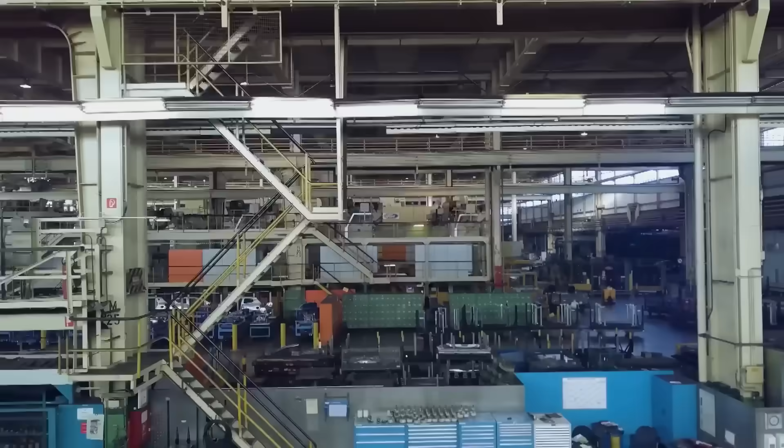The global economy is currently undergoing the greatest change since the Industrial Revolution. In order to remain internationally competitive, modern factories must be as flexible as possible and highly digitized. The smart networking of people, machines and industrial processes is the ticket to a new age. Industry 4.0.

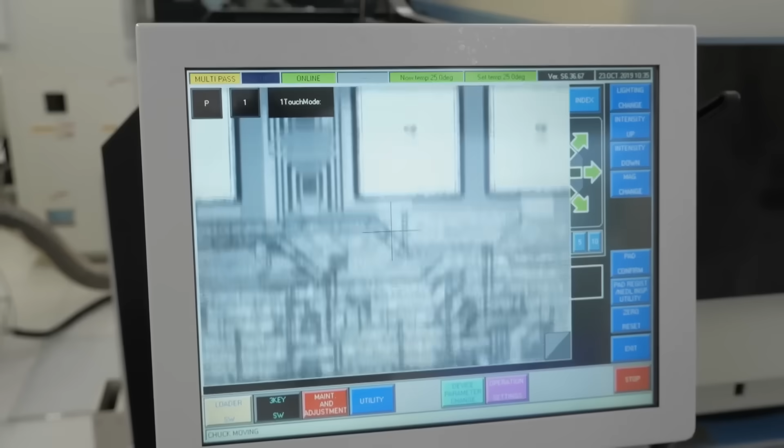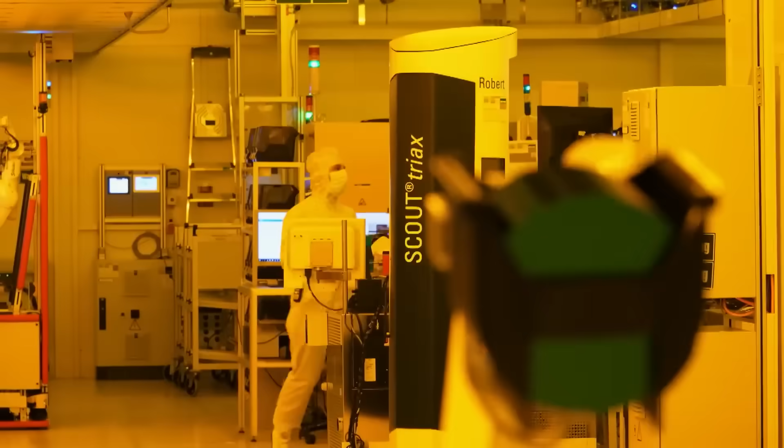Reutlingen in Baden-Württemberg has one of the most modern semiconductor factories in Germany. With meticulous care and highly automated, the soccer field-sized cleanroom produces around 1 billion micromechanical sensors per year, which are used in cars and smartphones. The structures in the nanometer range are applied to silicon wafers. Silicon is a semiconductor, but what is it good for?

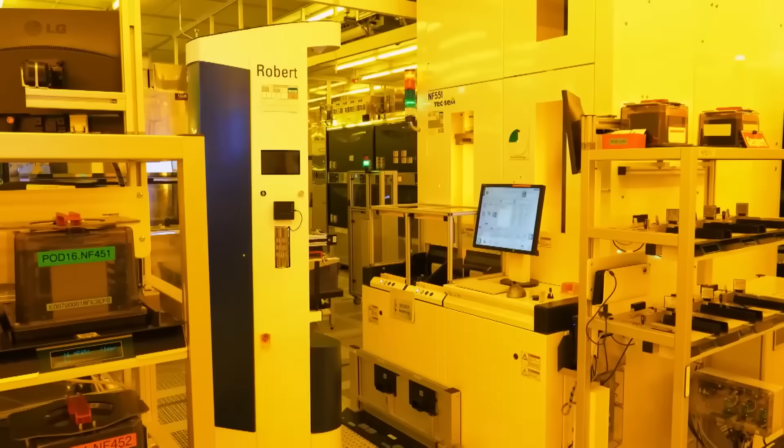Semiconductors, we actually have three terms here in the group: the senses of a device, the brain of a device and the muscles. We are currently the global leader. We've produced over 10 billion of these micromechanical sensors to date, both for automotive and consumer electronics.

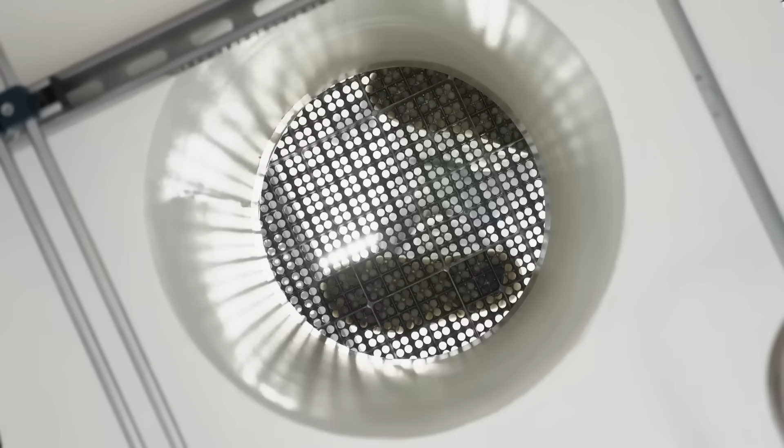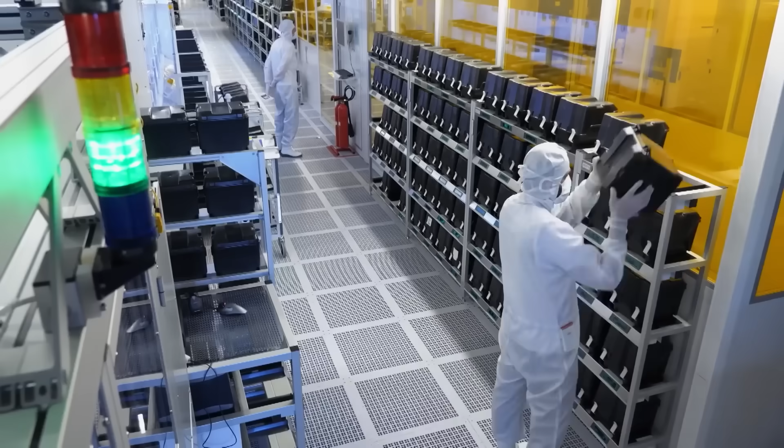In the so-called wafer fab, the future is being built. In the field of electric driving, autonomous driving, networking, but also in the consumer sector, we are continuously developing sensor technology. In the sterile, futuristic tech world of the plant in Reutlingen, as the internal code of the facility goes, it feels more like being in a space station than in a factory.

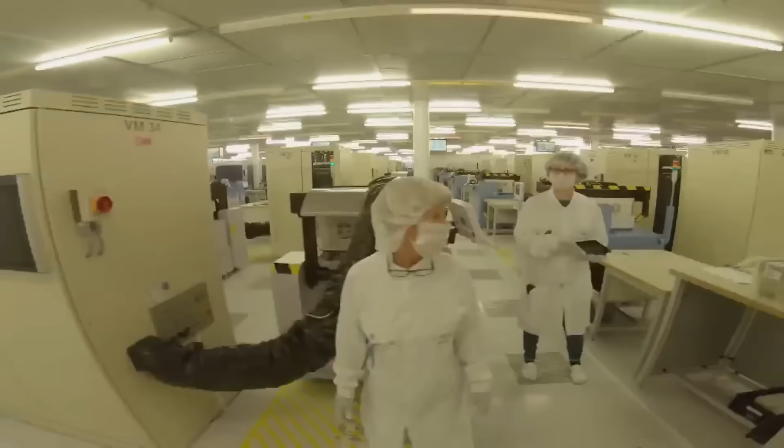Every square centimetre of the 23,400 square metre area is designed across several floors. A tremendous effort to enable precision in the tiniest of spaces. We model very small structures. The smallest are about 1,000 times smaller than a human hair. What is being built here in Reutlingen is found in countless products spread all over the world. In vehicles, mobile phones, in just about everything that requires electronic control.

Klaus Meder is chairman of the Automotive Electronics Division. In Reutlingen, we manufacture semiconductors and sensors mainly for the automotive industry, but also for the consumer sector and control units. Approximately half of all modern smartphones that you can buy on the market today contain sensors from the Reutlingen site, such as sensors that measure rotation rate, acceleration or pressure differences, and in every fitness tracker that we are likely to have today.

The group, which is best known to most people for domestic engineering, is also active in less visible areas of modern life. However, this would not be possible without a widely used chemical substance. The technical plant manager, Patrick Leinenbach, is responsible for semiconductor manufacturing at Bosch. The base material for our manufacturing processes is silicon. Silicon is a so-called semiconductor. It has both insulating and conductive properties.

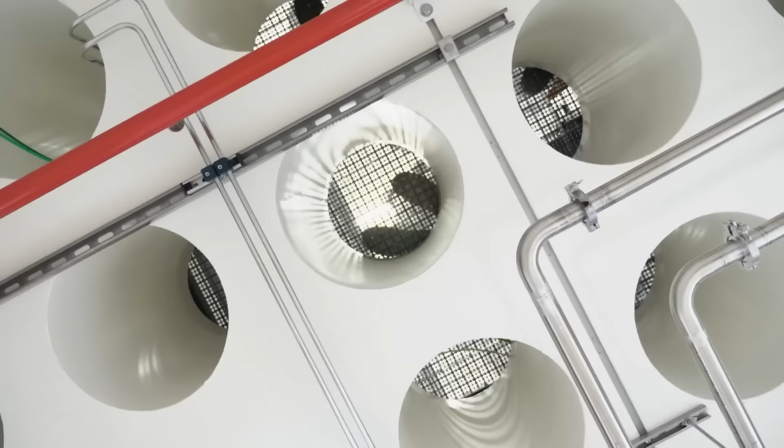To get this intelligence into the tiny parts, around 3,500 employees work in Reutlingen in 3 shifts. The real writing work on the silicon wafers is done by machines. Here, more than 15,000 of them. The wafer fab is a single highly automated machine that produces over 4 million individual parts a day. In order to maintain an overview here, computer-aided production control is required. Stefanie Hessel is responsible for this. Her team ensures that no errors occur during the thousands of strictly regulated parallel processes.

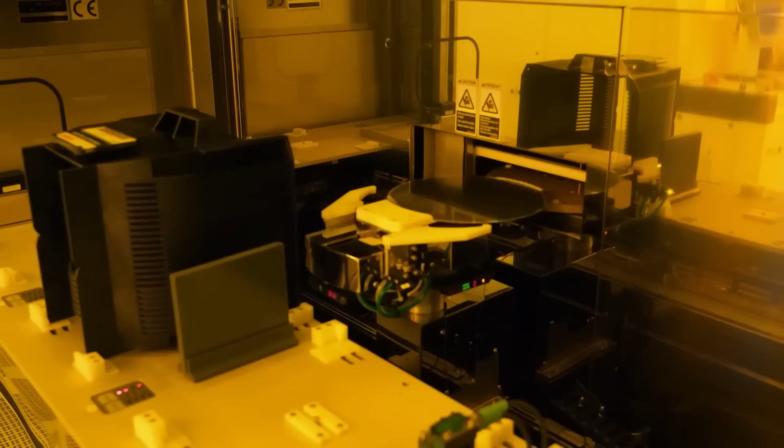The production control is responsible for ensuring that the wafers move ideally through the production process. A wafer is a silicon plate which is processed by us and which runs through up to 1,000 process steps in succession. The movement of the wafer is partly ensured by automation. This means that robot transport systems move the wafers through production.

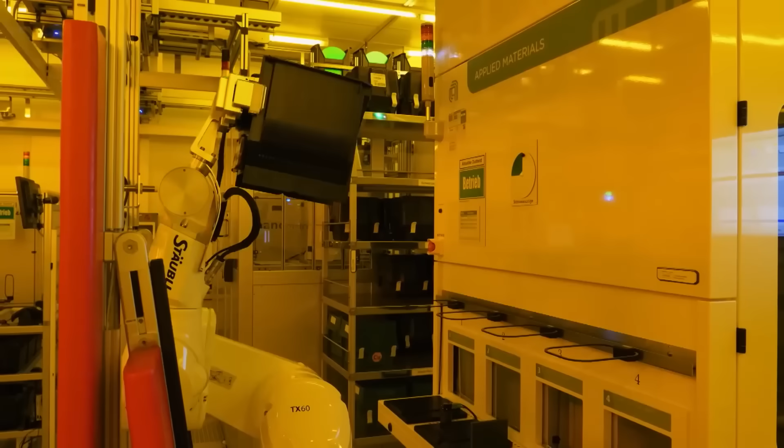The purpose of automation here is that each wafer must know where it's moving to next, what the next process step is that it will go through. That's where software, a planning system, supports us because it's such a complex situation. We have up to 70,000 wafers in stock, which move around here for up to 3 months and see the same equipment and process steps over and over again.

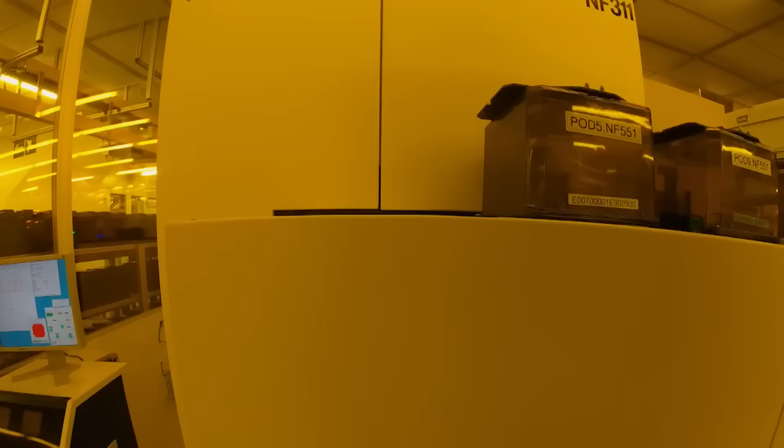But why is it necessary for the highly sensitive wafers to go through the same processing steps over and over again for months? Bekir Zermacic, who heads an engineering department, can answer this question best.

You can compare this very well to designing and building a house. You build the house on one level, create different rooms, and then go up to the first floor, to the second floor, then to the third floor. With the chip, it's very similar. On one level, you realize different building elements. And in order to make the most out of the chip space that you have on the wafer, you have to move up. This means that the different other levels then happen on the different other floors.

The process sequences are repeated in the same way as in house building. There are crafts that do plastering or install cables. This takes place in every room, and that's what we do on the wafer surface in the same way from level to level in recurring cycles.

To be able to produce houses on a micro scale, Bosch employees in the wafer fab, the clean room of the highest category, have to follow a strict procedure every time. No one enters the facility in normal clothing. Washing hands and walking over several adhesive mats on the floor is mandatory to get into the changing room in the first place. And that's where the actual cleanroom clothing is waiting.

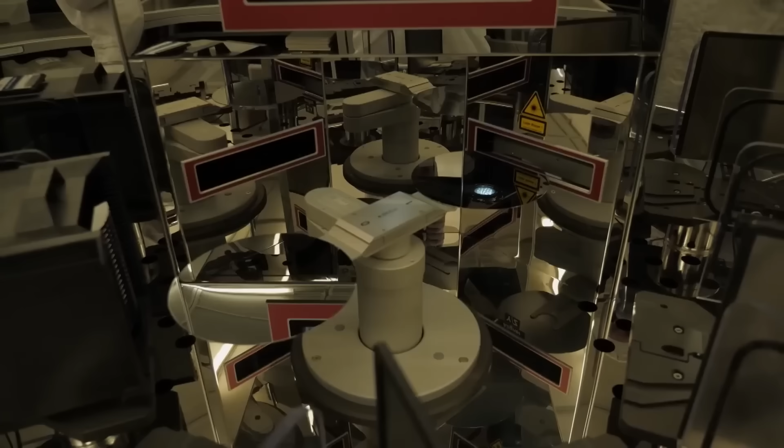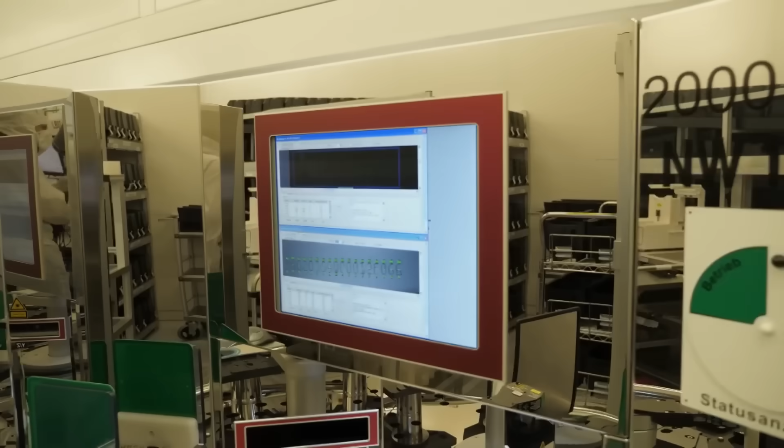The final preparations, then a strange machine world waits behind the overpressure airlock, which permanently blows air and therefore possible particles out of the clean room. In the wafer fab, nothing is left to chance. Every installation, every section and every step is precisely planned. In 2010, the group inaugurated its Reutlingen factory for the 200mm wide wafers. This is where the MEMS' often months-long construction process begins.

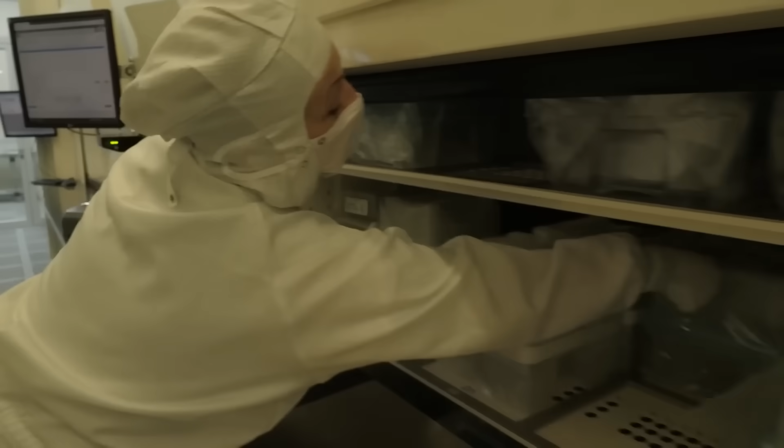The raw wafers are ordered here. They come up in this paternoster and are then launched into the system so that the computer knows exactly which material is coming. This is then booked so that I can put them on the labeler. This is on station E2. First, each wafer receives an ID. Before the wafers become chips, they first get a chip.

This chip helps us to know where each box is at any moment and which step is planned next. This is an RFID chip that is written virtually and not manually. That means we use it several times. As soon as the box is delivered, the memory is erased and set to 0. As soon as a new batch is launched, like here, it is rewritten with the new batch number.

The number of the wafer on the RFID chip remains the same as long as the wafer is here in production. That means it can take from 14 days up to 3 months.

Production time for such a sensor or chip can almost be compared to building a house. There are big differences there too. Am I making a prefabricated house or building brick on brick? In our production, we have different production times depending on the design and on the chip. We're talking about processing times from a few weeks to 2 or 3 months.

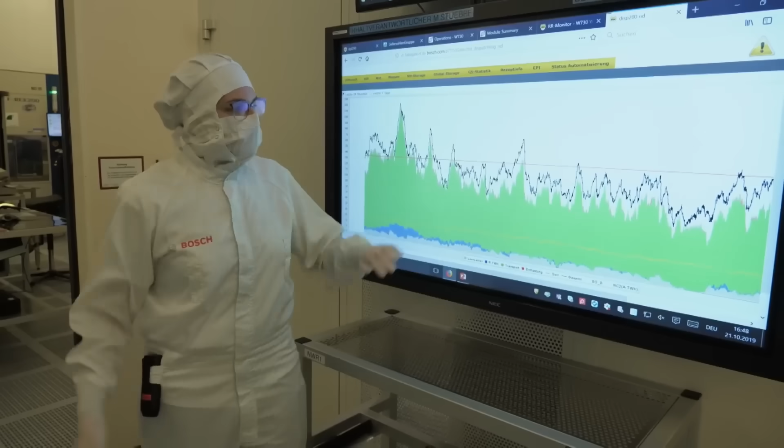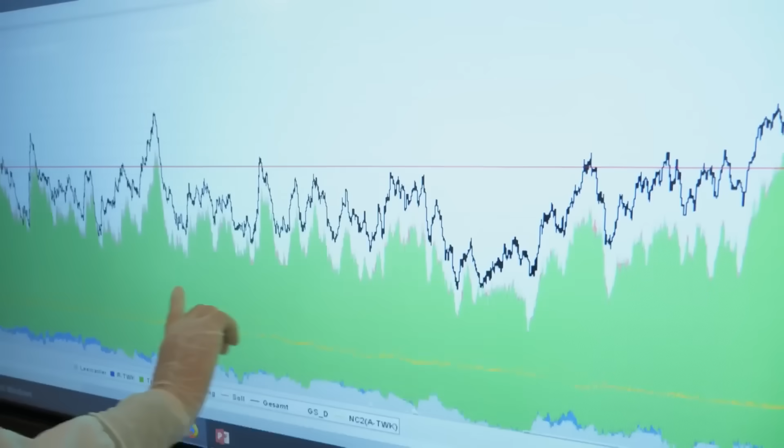Here we can see on a chart what we do all day in production control. We see what the utilization is, here, for example, in automation. This way we can see where we have to intervene to avoid congestion. This chart shows the utilization in automation over the last 24 hours online, from yesterday up until this very moment.

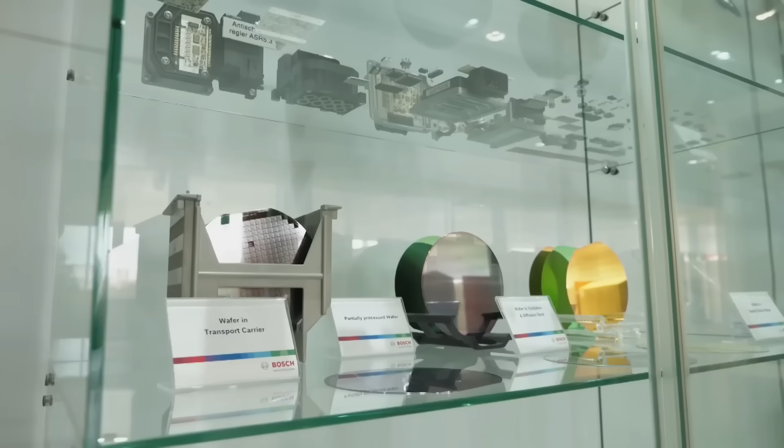Such a high-tech cleanroom cannot be run in just any old factory. Semiconductor manufacturing has special requirements. Not only the immediate cleanroom environment, but also the building around it must have very specific features. The silicon wafers and their fragile structures are so extremely sensitive that all employees who are in the same building must follow a special routine.

Facility manager Karl Schull knows what needs to be considered in the wafer fab. We have regulations concerning entrance to the building. We're not allowed to enter the building in our regular shoes. Just like the production levels, we also have a range of purity classes. Down here, we come in wearing regular shoes.

Then we change into indoor shoes, which I'm wearing now. Then we go one level up. We change from our regular clothes to jogging clothes, which I'm also wearing now. And then another level further up, we put on the cleanroom clothes and enter the cleanroom.

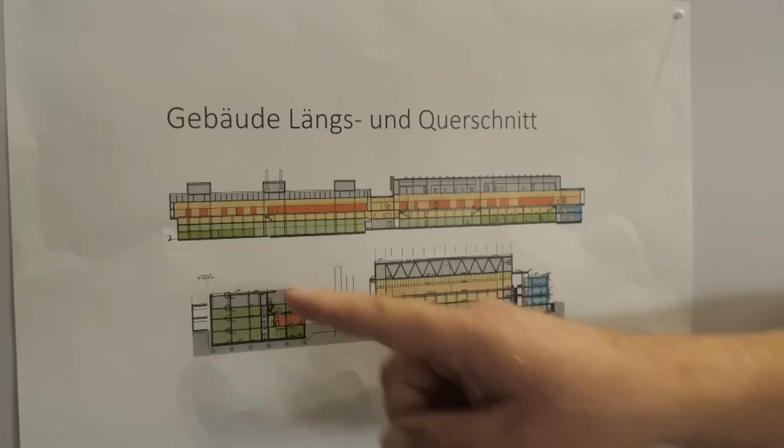The building has a very specific structure. Here we see a profile of the entire building with a total of 4 stories. The top story is where the ventilation system with the supply and exhaust air is accommodated. Then there's the floor where all the cleanroom technology and our production facilities are located.

Below this floor is a cleanroom sublevel, and the lowest level is the supply level. Here, the entire media supply and the vacuum pumps are located. And all this is done to create the ideal environment. An important part of the production is the so-called Bosch process. What exactly is that? It has revolutionized the manufacturing of micromechanical sensors.

The key process for manufacturing is the so-called Bosch process, which was developed by our Research and Advanced Development Department in the mid-90s, and was introduced into manufacturing at the end of the 90s. With this process, it's possible to produce certain structures in silicon, which then enable us to create sensory abilities. For example, measuring accelerations by juxtaposing 2 plates, or creating thin membranes that can map the corresponding pressures.

All this is due to the Bosch process, which was developed by Franz Lärmer and Andrea Urban in the mid-90s. It then received the European Inventor of the Year award, and later it was also awarded the Future Prize by the German Federal President as part of the holistic approach to micromechanics. The structures that are applied to the wafers are so delicate that even a storm outside can lead to production disruptions, or rather, it could.

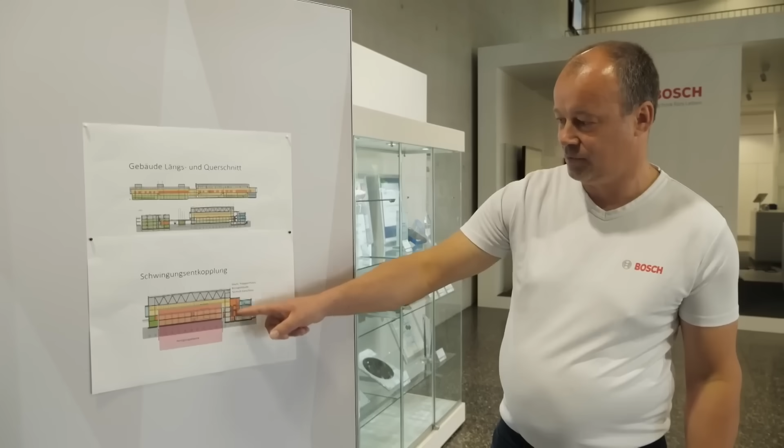In principle, the building has 2 parts, a building within a building. We have one large block, 48 meters wide and 100 meters long, and it's housed in an outer skin that's completely decoupled. That means that the production level sits on top of this. It has a foundation that's 1 meter thick and weighs over 10,000 tons.

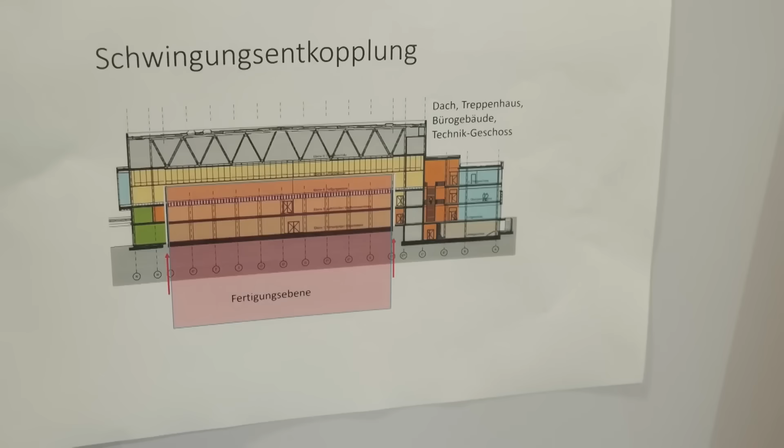The roof that hangs above it, which you can see up here, is unsupported. That means that all the ventilation technology and cleanroom technology is completely decoupled from the production machines. This ensures that all the vibrations that come into the building from outside are not transmitted to the production systems. This joint is visible throughout the entire building.

We're now down on the supply level. This is the inner building, as I explained earlier. Down here is the joint that separates it from the rest of the building and runs through all levels. What we see here is the joint that separates the two buildings.

If you look at it from the outside, you'd expect a gap of about 5 centimeters filled with silicone. But we didn't, because that would also cause strong coupling again. Under here, there's only bast fiber which has been sealed so it's compatible for cleanroom use. Down here, this is just a cover. The construction is the same as on the wall. What we have here are 2 metal plates which can move freely on top of each other in order to have decoupling here as well.

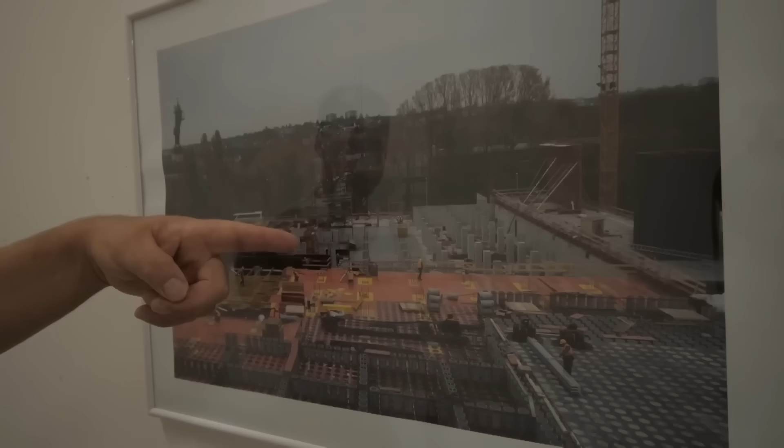Here we're walking past the gallery, where we can see the building's construction stages, and we can have a look at the different levels. Here you can see these circles, the tubes in the floor where the air flows through later. The cleanroom ceiling is supported by the columns, which is then the airflow level. The air flows back up into the cleanroom.

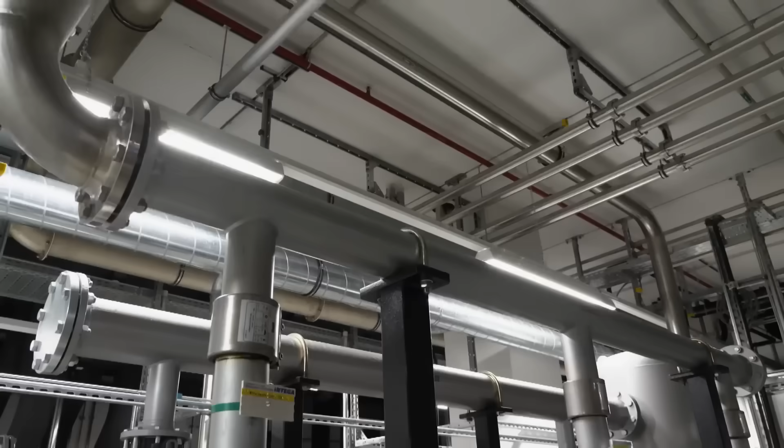It's very loud here, so I have to speak up. In the background we can hear the vacuum pumps from level 1, which create the vacuum for the production systems. The sophisticated building technology, elaborate in every detail, reflects the precision required for manufacturing semiconductor products. The basic condition for working reliably in the wafer fab is the highly specialized environment.

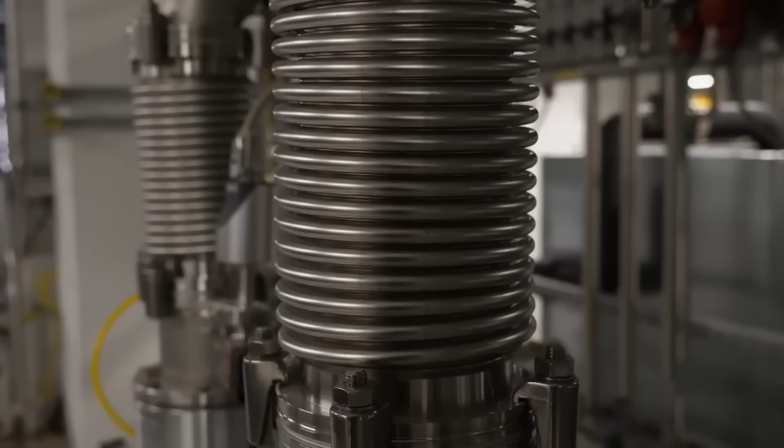Thomas Richter is responsible for the wafer front end in Reutlingen and knows exactly what challenges the employees from production planning have to overcome. Everything that the systems build is first digitally simulated. Our manufacturing processes are relatively complex, so the software is used in a particular way. We always have to know where our material is, which processing step it's in, what the next step is to avoid duplication, and we always have to pick up the right material in the right order.

This can no longer be done on the production control handout. This requires intelligent software that maps out everything that happens in the real world to a digital twin in a parallel world. Intelligent algorithms then determine from this: which material comes next, and what is the next production step.

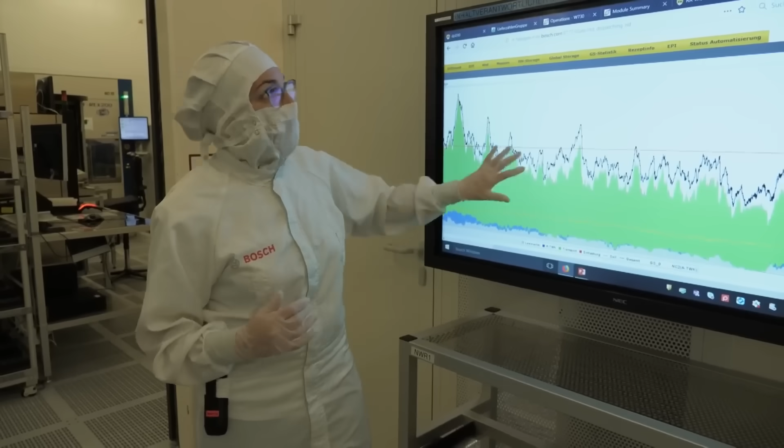Each individual wafer contains up to several thousand chips. We are talking about a complexity of up to 70,000 wafers that are in production here. These 70,000 wafers are moved 24 hours a day, 7 days a week. In order to manage this complexity, you need the tools to do so, because as an ordinary human being, you can simply no longer understand it.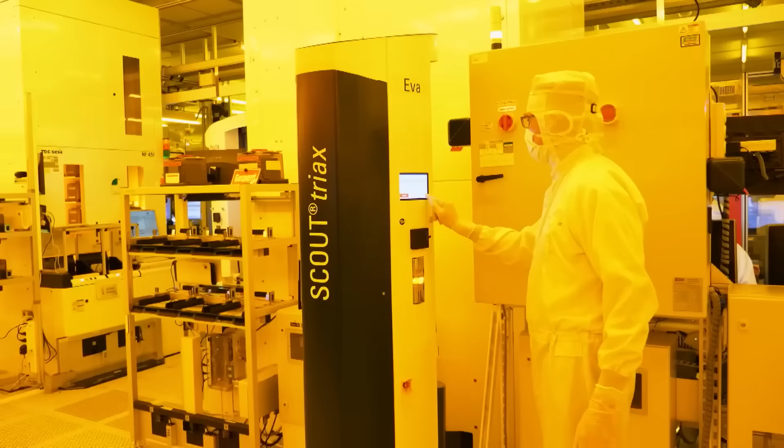To cope with this complexity, it's best to leave each individual logistical decision to the computer. Therefore, a large part of the production in the RTP1 is fully automated. This robot choreography is directed by IT engineer and automation expert Peter Buzek and his team.

In fact, we as humans usually don't know where the robot will go next. That's also the special thing about automation as we've designed it here. In fact, all decisions about a robot's next destination, i.e. which batch it should take to which plant, are determined in real time. To ensure that everything runs smoothly, the production control is always close to the action, but only intervenes when necessary.

We use the digital twin to form the condition of the material on the line. Which production step is pending? What is the current state of the system? Which order is the most urgent at the moment? We map all this digitally in software and control our production flow via the software. The software tells the machine which material to take and which steps to produce.

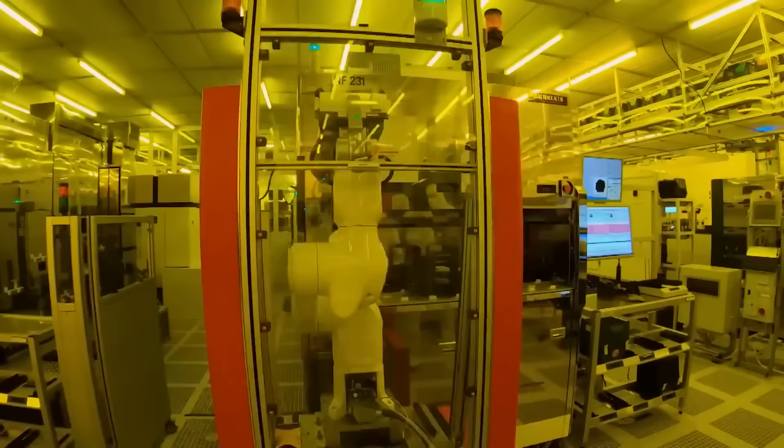To develop maximum efficiency, two core areas in particular are automated. On the one hand, automation as we see it in this area here includes the unloading and loading of our wafers from the production lines. On the other hand, it also includes transporting the batches from one station to another. In this machine choreography, each protagonist has a distinct role. Specialization increases the output.

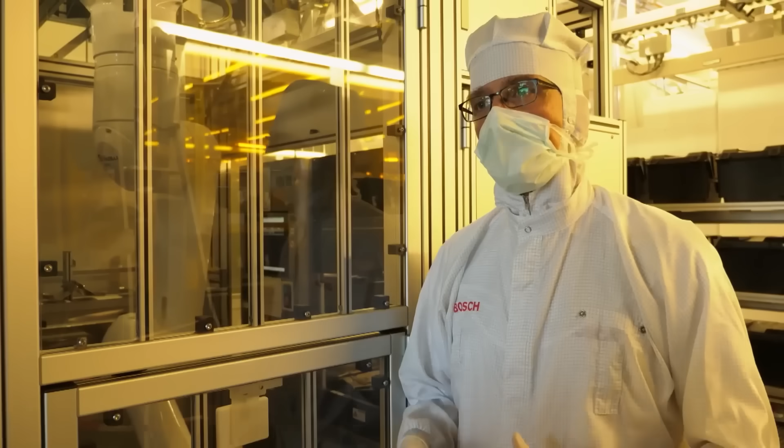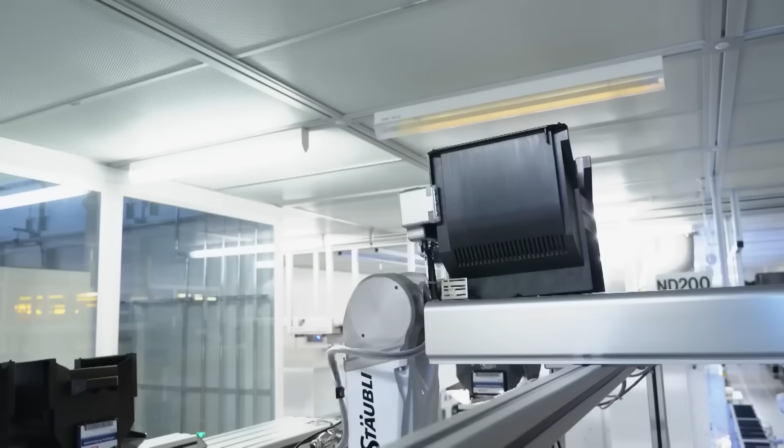The production area in our clean room is very expensive. Therefore, we're interested in using this production area as efficiently as possible. In addition, we can realize fantastic solutions through automation, such as this robot booth we can see here. The robot, which is installed in here as a stationary unit, can move batches in a very confined space quickly and precisely from one system to another.

A human being is not suitable for this task. We can't touch the wafer because we work under clean room conditions. To give you some idea, clean room means it's like looking for a cherry stone in Lake Constance. That's how pure the air in the clean room is. Of course, the human touch, even if they wear gloves, would be rather counterproductive on the wafer. We would apply dirt and structures and destroy the parts.

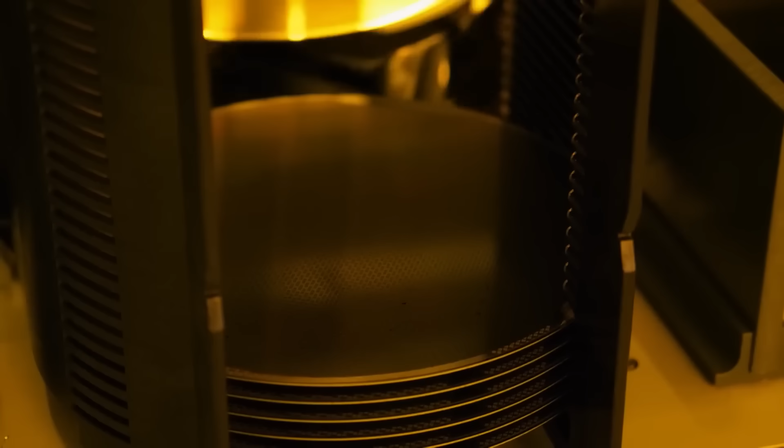We are here in photolithography, which is basically the heart of our production. Photolithography is an optical imaging process which happens with photosensitive materials. That's why we use yellow light to avoid incorrect exposure. There's the example of building a house when realizing our product. Photolithography provides the building plan for each floor that we build in the house. For each of our products that we manufacture, there's a building plan for each level, up to 36 levels per product.

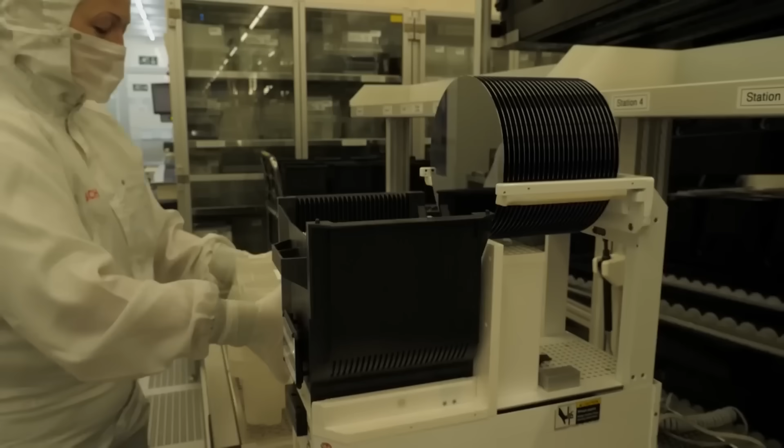Humans are there to fix malfunctions. If everything runs smoothly, we watch what happens. If we have a malfunction somewhere, we're there quickly and can eliminate the error or the shortage with our know-how. The wafers we process in production are not touched by people. We use automatic equipment for this. This is our level of automation. However, we also work in the Industry 4.0 world, and there we're just moving on to the subject of 5G.

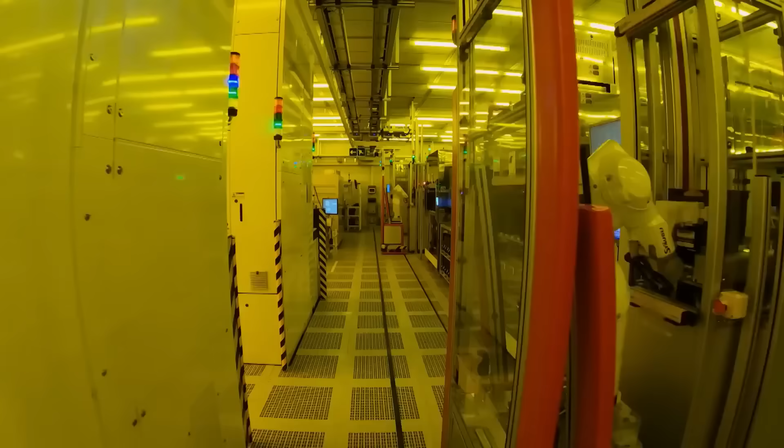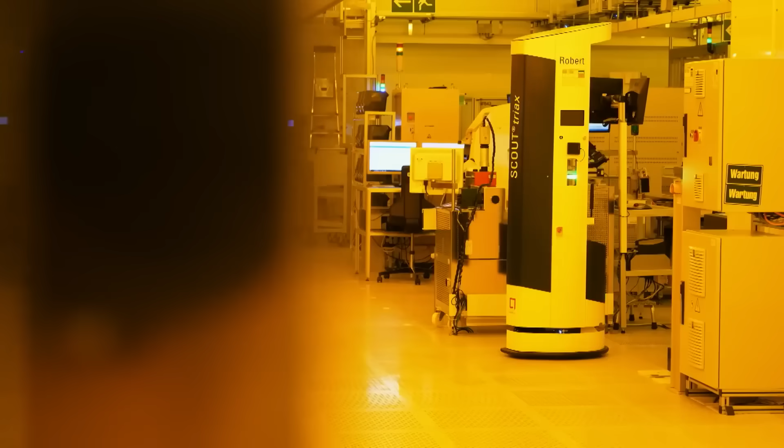The reason we have 4 different generations of robots is that on the one hand we have stationary robots that work in specially constructed booths. These are small rooms where we can really make optimal use of the available space. And a stationary robot which is capable of making really adventurous movements in a very small space and can move batches very quickly, is ideally suited to this purpose.

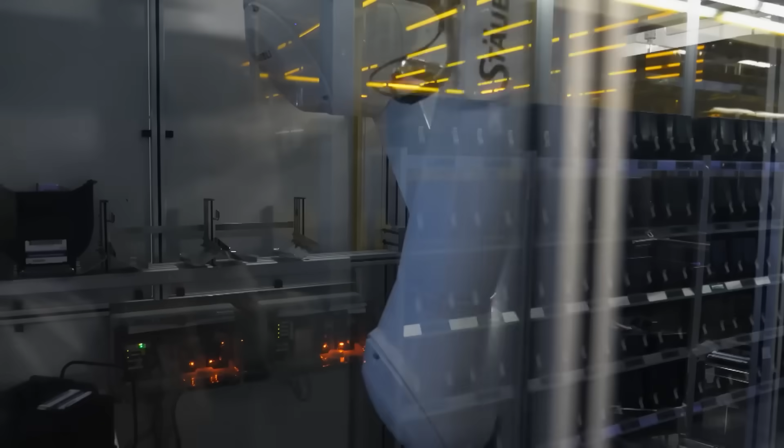However, there are 3 robots in Reutlingen that enjoy a very special status. We named the robots ourselves, of course. They're Eva, Paula and Robert, and there's quite a nice story behind it. The real purpose of naming the robots was to differentiate between them. It is, of course, much easier for us humans to deal with robots if they have human names.

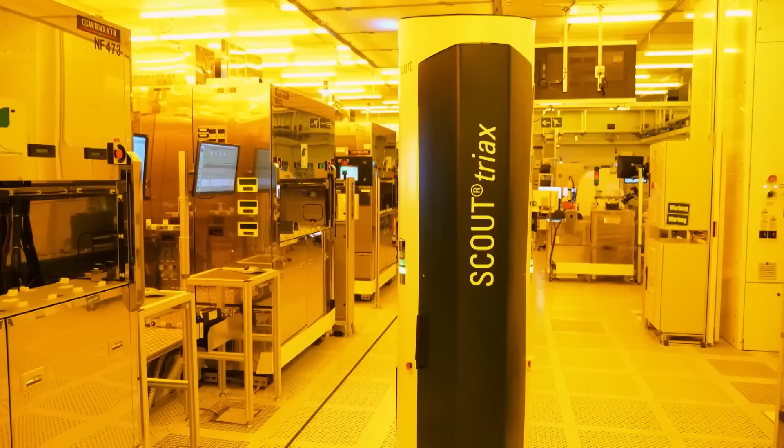The very special thing here is that we named them after the children of Robert Bosch. This is a way for us to make sure that these robots belong to the Robert Bosch family. Robert Bosch, who founded his workshop for precision mechanics and electrical engineering in neighbouring Stuttgart in 1886, would certainly be proud of his mechanical descendants.

After this quality processing step, the goods move on to the next processing step, which can be diverse. That means I don't know the exact destination. Therefore, the goods are transported via the transport system behind me back to the main aisle and are distributed from there.

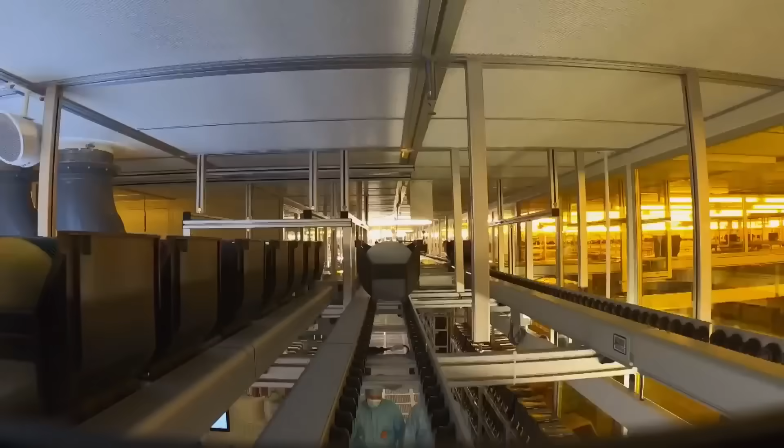And every time a batch travels onto a turntable, the decision is, does it go straight into the storage or does it turn off to the next production line? In these situations, decisions are made in real time. The system recalculates which priority is now the important one and which route the batch should take.

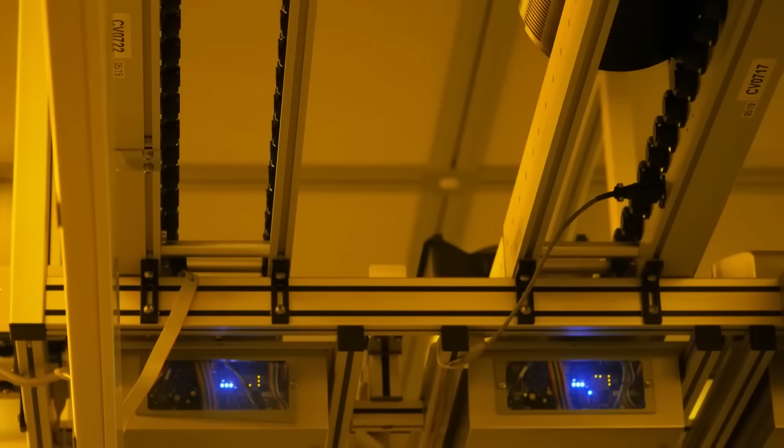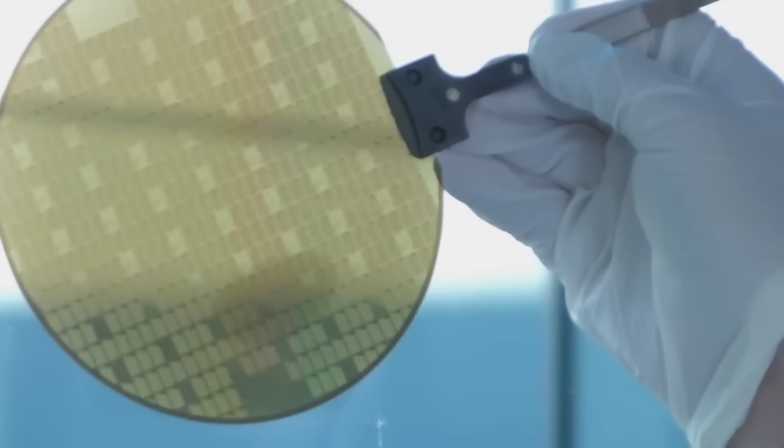While the routes of the individual batches are constantly being recalculated, the direction for further development in Reutlingen is already set. We are now at a point where we will revolutionize electromobility, where we use so-called silicon carbide, which enables us to produce products that in turn enable our customers to provide electromobility with a longer range, lower losses, and lower energy requirements.

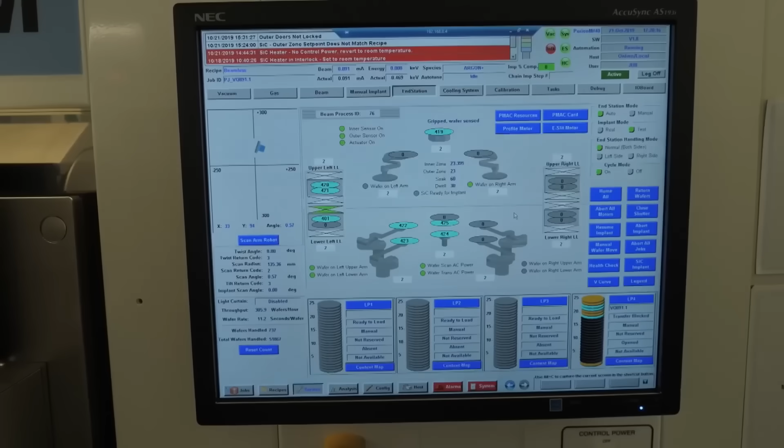Silicon carbide is the material for the chips of the future. The chemical symbol for it is SiC, or SiC as it's known in the industry. In order to use the semiconductor as desired, so-called ions, positively charged atoms, must be implanted in the in-house particle accelerator.

Ion implantation is one of the most important process steps we have in semiconductor manufacturing. It's very complex. The machines are amongst the most expensive, largest and heaviest machines available in the semiconductor world. This implanter is about the size of a car garage, weighs about 14 tons and is very expensive.

At these high energies, we then shoot the particles into the semiconductor material. Of course, the greater the energy, the deeper the particles go into the material. However, we can adjust this very nicely with a lot of effort. What we can also adjust very nicely is the amount, the number of particles we implant, the dose.

The SiC ion implanter has its own separated area. Here we are at our SiC ion implanter. This is nothing more than a particle accelerator. Since we're working with voltages that are 1,000 times higher than those that come out of our power outlets at home, we have to take certain safety measures. The white doors are only an external protection, but why all the fuss?

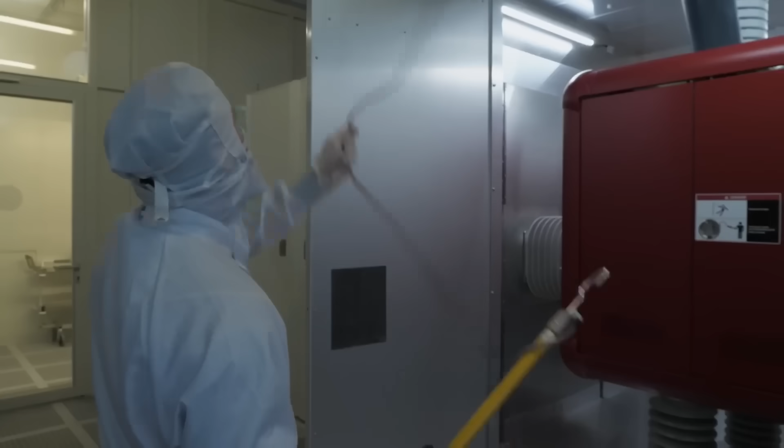The semiconductor conducts the electric current very slowly at first. With ion implantation, we can specifically introduce foreign substances, so-called dopants, into the semiconductor material. We call this doping, and it changes the electrical conductivity of the semiconductor drastically. This is the basic prerequisite for ultimately being able to produce electronic components such as transistors or similar things on a semiconductor wafer.

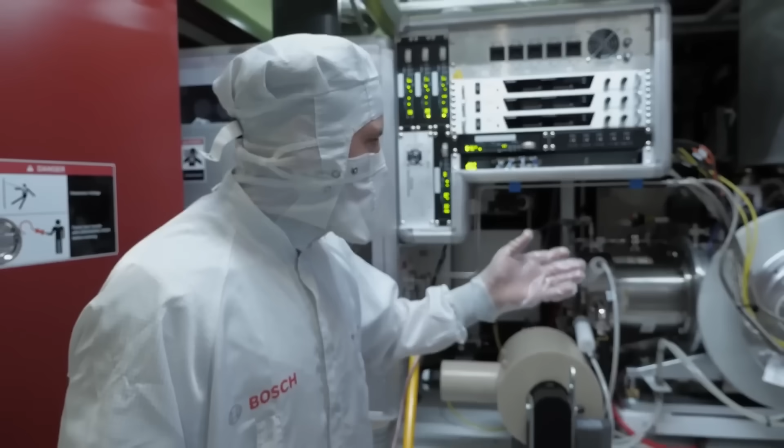The implanter essentially consists of 2 parts, source and process chamber. In the machine, we have an ion source. Ions are positively charged atoms. They are accelerated, guided around the corner here, come to the front of the process chamber where they're guided onto the wafer.

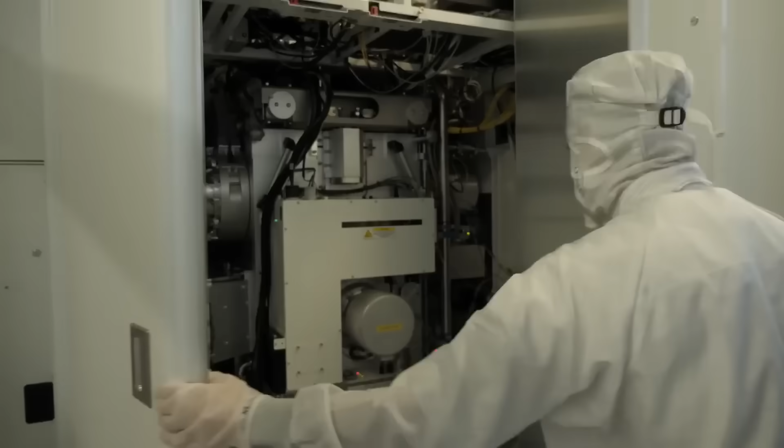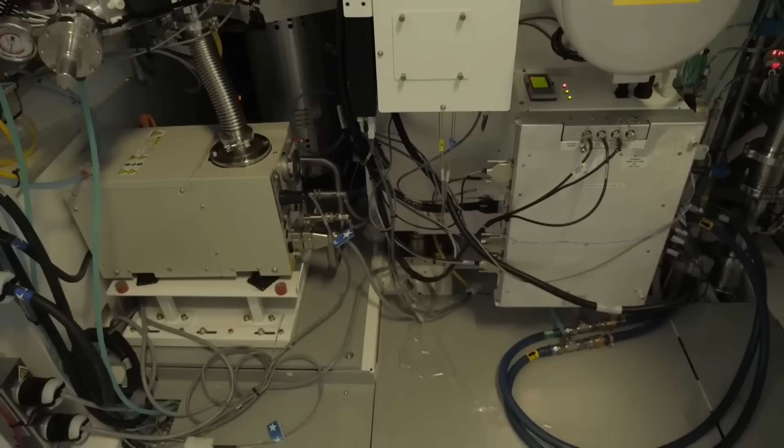There's a lot of know-how and effort behind it to make sure that the machine does exactly what we want it to do, namely to shoot the right dopant with the right energy in the right amount into the material. The system technicians have to put a lot of effort into keeping the machine running. Ultimately, they also have to create this high vacuum so that the ions can fly freely and are not disturbed by any air molecules. A lot of effort goes into that too.

For everything to run smoothly in the semiconductor factory, the different departments have to be coordinated, knows commercial plant manager Dirk Kress. We at Bosch manufacture sensors that make things talk, that make things record data, and that ensure the connection within the Internet of Things. We manufacture around the clock, 24/7 so to speak. It's a continuous manufacturing program.

The site is open 362 days. We always like to say 24 times 7. We schedule all of these 21 shifts a week completely. In other words, if the gears don't engage properly here, we have a backlog that can hardly be cleared again. So it's very important that all departments, groups and teams work well together and really interlock like a gear wheel system. And then that has to work for 362 days.

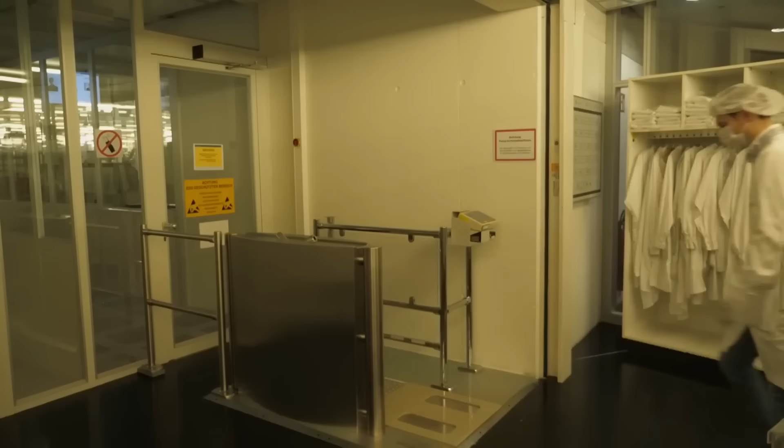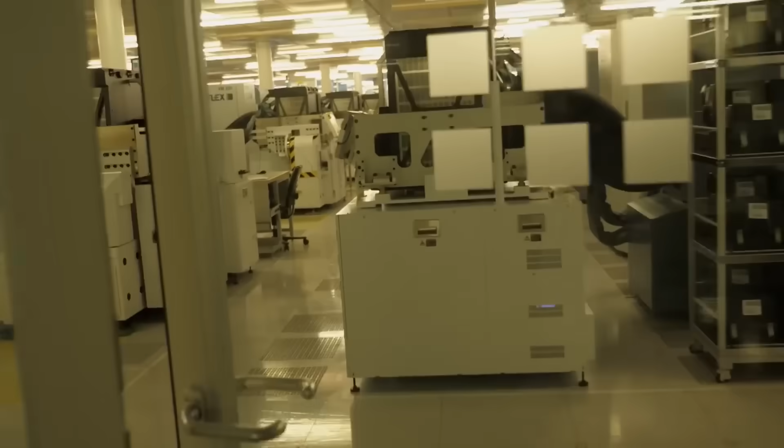The enormous effort that is put into the production of the several million MEMS, micro-electromechanical sensors, every day is considered in their various test cycles, which are a science in themselves. Only the dress code is a little more casual.

We have a clean room here too, but the wafers are already fully processed at this point. That means that the clean room standard in this area is no longer as critical as before. Therefore, the covering is not as extreme here either. We only wear face masks, hoods and gloves combined with a clean room gown.

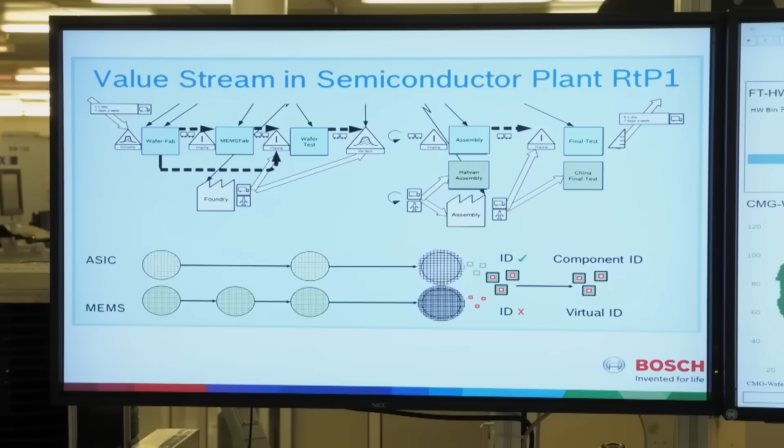At the end of the process chain of 2 to 3 weeks or 2 to 3 months, a final electrical test takes place. That's the equivalent of my final building inspection or acceptance, so to speak. Only when that has been passed and every single chip is judged to be in order, can I then hand over the keys. Just like when you build a new house.

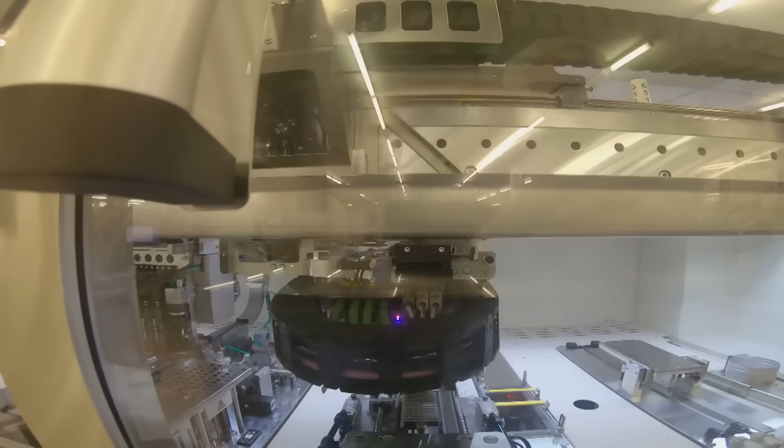So that the final building acceptance can take place, about half the employees alone are on duty in the test centre. The wafers produced in the wafer fab are delivered here and are measured and tested for function. This means that every wafer produced in the wafer fab has to undergo a quality test. The chips on the wafer are tested 100%.

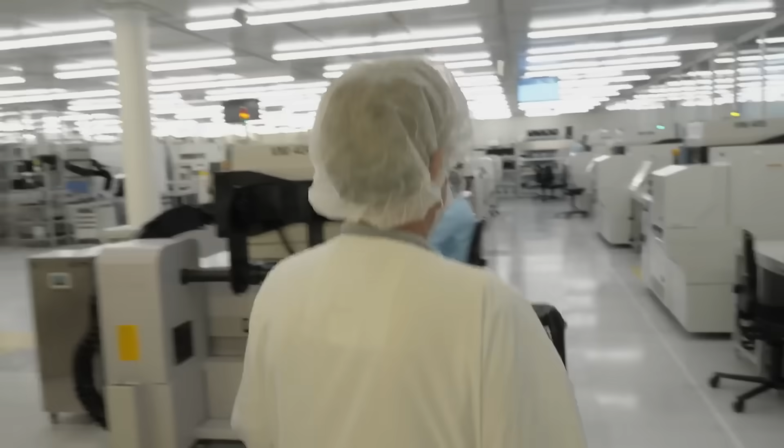When the wafers are delivered, they are sealed in the wafer box. The operator or employee who works here is not allowed to touch the wafers. We only have carriers or boxes that we transport, which we load into machines. We are not allowed to touch the wafers at all.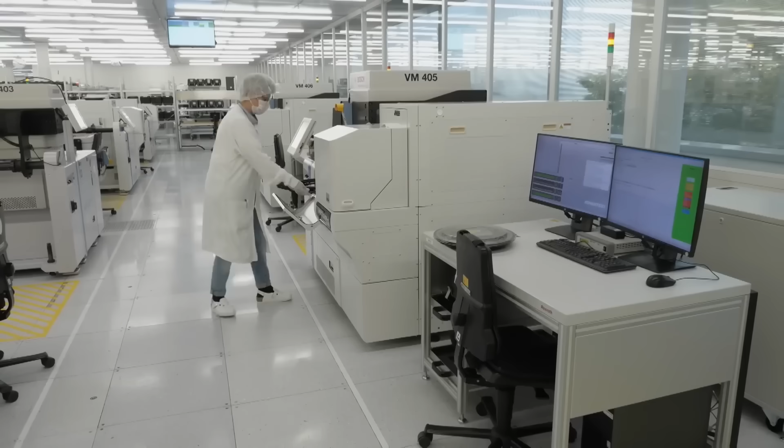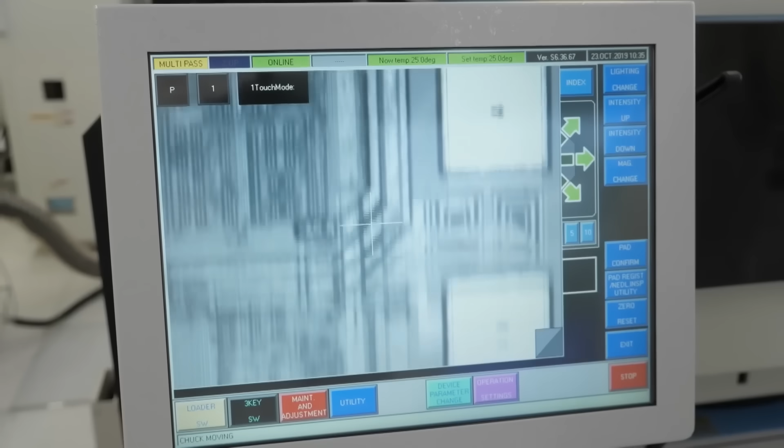During measuring, the chips are contacted with such measuring needles. The measuring needle is about the size of a human hair with a diameter of 75 micrometers. After loading, the additional hardware must be inserted into the machine to ensure that the correct contact unit for the particular type is installed. The machine uses a camera system to focus on the needle tips and then knows where the needle tips are and positions the wafer directly under the needle tip so it will hit the pad.

Due to the variety of products we're testing here, a wafer or map has different numbers of chips on the wafer. Depending on the function, the chip is larger or smaller. It means that we have a few hundred chips to several thousand chips on one wafer, which we have to contact because we're doing a 100% test.

On the electronic wafer map, the employee can see which chip has been measured and which one still has to be measured. You can also see which measured chips were good and which were conspicuous. The conspicuous chips are not processed any further. When the wafer measurement is finished, when the complete wafer has been measured, the data is sent to our system, stored, and is sent to the next quality gate, where the visual inspection of the chips takes place.

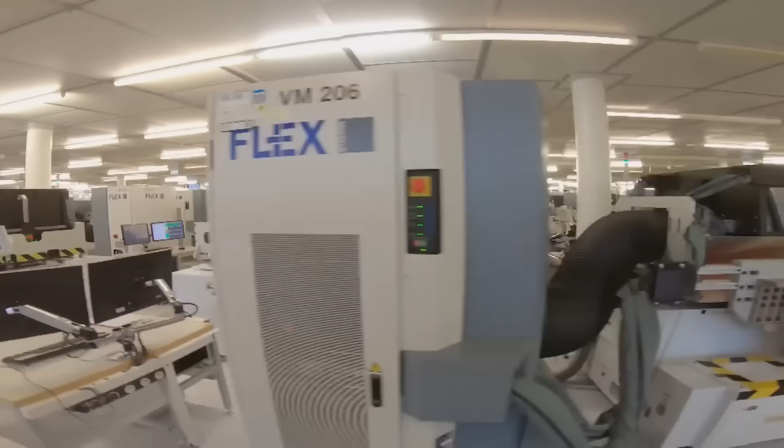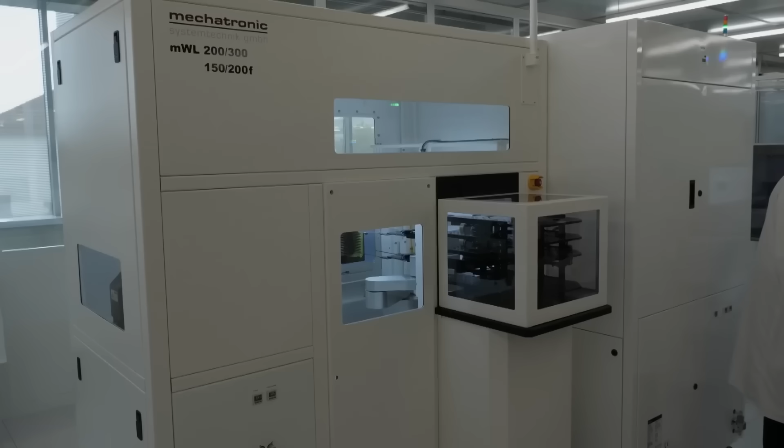The electrical measurement is only the first part of the control stage. Just as there are possible errors that can be measured but not seen, there are also possible errors that get through the measurement but are detectable and therefore avoidable. Visual inspection is the domain of process engineer Heiko Schäfer. It is his responsibility to make sure the visual inspection finds any final defects that may have sneaked through. Fortunately, however, not with the naked eye. Only a special camera can do this. For this task, he and his team also have highly automated equipment at their disposal.

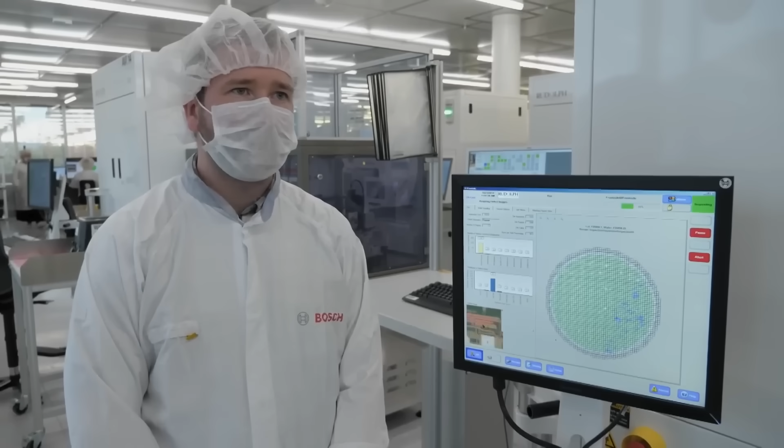We're here at the visual inspection, where we visually inspect all wafers and all chips 100% to find any anomalies that are still on the wafer. What does visual inspection mean exactly? We look at the chips which were found to be positive during measurement to make sure there are no more anomalies. The chip can then be delivered in top quality. Here you can see how the camera runs over the wafer chip by chip and scans it, and immediately carries out an evaluation of whether the chip is still good.

An anomaly can be something like a conductor path, which is perhaps not completely distinctive, but enough for an electrical measurement. This can lead to problems in the lifetime of the chip. Such irregularities are found here, and they result in these chips not being released for delivery. We have systems that perform the visual inspection automatically and are trained by us. This enables us to carry out an image-to-image comparison with a very good and optimally trained reference image so that the quality is high throughout the entire product line.

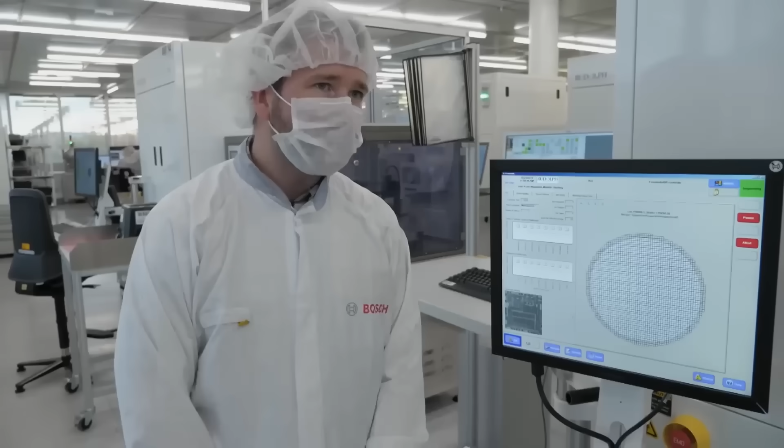Yet another technology is used. Our group has set itself the goal of producing or equipping all our products with artificial intelligence in the next decade. I always explain this to myself by saying that it's the reproduction of intelligent action by algorithms. And that's what we're doing here. We have products that contain artificial intelligence. But we also have products that are produced with artificial intelligence itself.

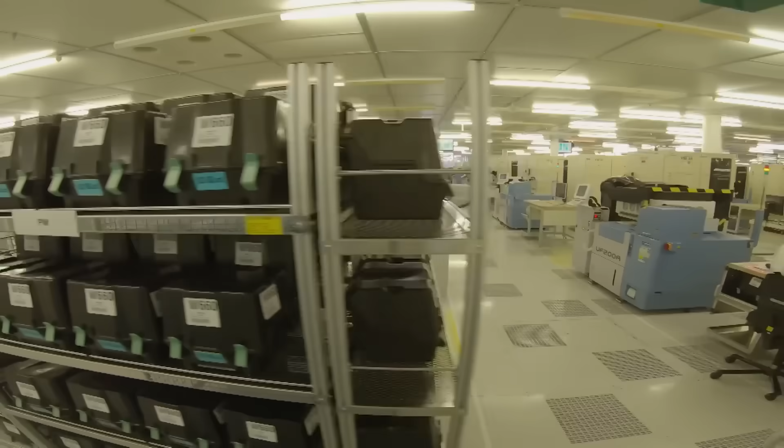I'm using an algorithm to teach a system to get better. Normally, I have a good part and a bad part compared to the visual inspections, and my program compares the good part with the bad part. However, I can also teach the program to learn what a good part is. That means I can make programs learn, something which will then have uses in autonomous driving, for example.

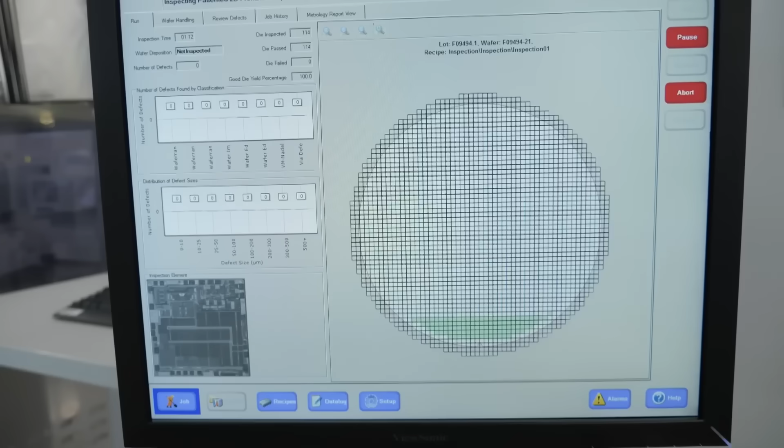Used here in our production, this means that we make processes that are monotonous, that are prone to errors, using individual systems that simply improve themselves, for instance in planning or in optical controls. Imagine that you have to search for and evaluate anomalies in images for 8 hours a day. At some point, this becomes very monotonous. That's why we want to relieve the employees by using artificial intelligence.

Humans must train artificial intelligence in this area. That means we have to know about the complex algorithms we use there. We have to provide these sample images and evaluate them to ensure the algorithms have their correct function at the end.

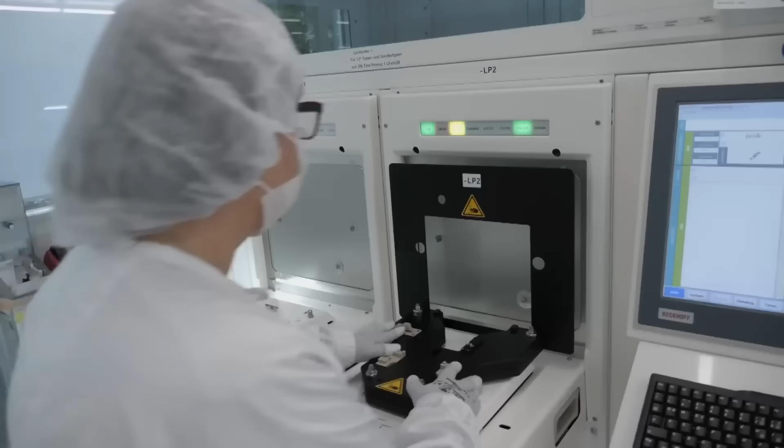Depending on the application, the chips on the wafers are finally built and successfully tested after weeks or even months. Then there's nothing to do but wait. The finished batches finally end up in the so-called die bank. Here they are stored under special conditions and wait to be used as sensory organs or as the brain of a device. Engineer Matthias Pauli is the man in charge of die bank.

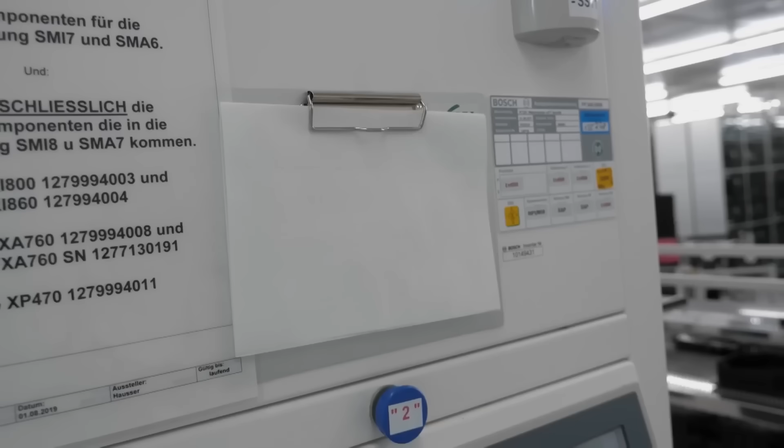The RTP1 die bank is our strategic warehouse for finished and pre-measured wafers. Die bank comes from English and means nothing other than wafer storage. And what exactly characterizes a strategic warehouse? Strategic warehouse means that if the customer places an order with us today and has a desired date in 6 weeks, then we would have no chance of meeting that date if we started to manufacture the wafers today. Our goal is to have the wafers fully processed and pre-measured in stock so that we can ship the wafers to the next 2 stations, assembly and final test, on the same day and meet the customer's desired date.

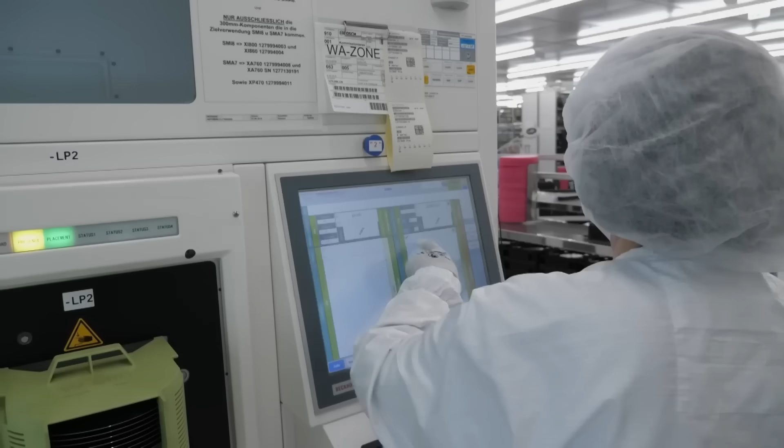The wafers are not touched by human hands until they're removed from storage. Roughly speaking, we have 6,000 batches stored here, all of which are logged systematically. This means that you don't have to search here. You can find out directly via the system where the goods are located that are needed, and then go straight to them and take them out of storage. How much time the wafers, with all kinds of chip kits, actually spend here varies greatly. Usually the storage period is 2 weeks.

However, we also have special cases, such as final stockpiling of parts that are no longer produced today. They are also stored here, and we can store them for up to 10 years under these nitrogen conditions. If it goes beyond the 10 years, special requalification tests must be carried out. If they're successful, we can also outsource wafers that have been stored for more than 10 years.

We don't store the wafers in normal air, but in nitrogen, in clean rooms class 1000. That's because the wafer surfaces are still freely accessible and are very sensitive to corrosion or even damage. And this nitrogen rinsing makes sure that the wafer surface remains unchanged. In order to save nitrogen, a major issue here, we have installed a special control system. If a certain humidity value is exceeded, the nitrogen control is triggered and blows out the humid air.

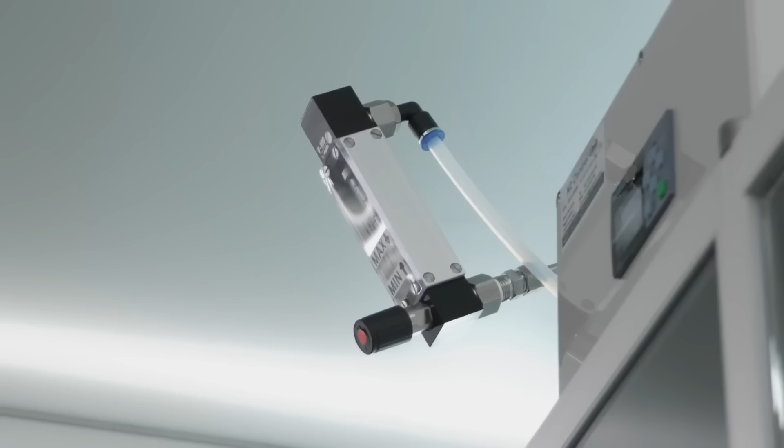A major issue is not only the desire to save nitrogen, but also the safety of the employees. After all, nitrogen is only harmless in the air if it doesn't exceed a certain proportion. The level of oxygen content is monitored constantly. If it were to drop below a certain level, an alarm would be triggered here, which would first be processed by the supervisors. A dangerous situation would immediately trigger an evacuation alarm. Fortunately, this has never happened before, except for practice purposes.

More than 4 million of these end products leave our plant every day, all of which were manufactured and tested here in Reutlingen. The traditional German company is optimistic about the future. A great deal of know-how and effort will therefore continue to be invested in these tiny but smart building blocks of our everyday technological life. The RTP1 in Reutlingen, a true mega plant in a class of its own.